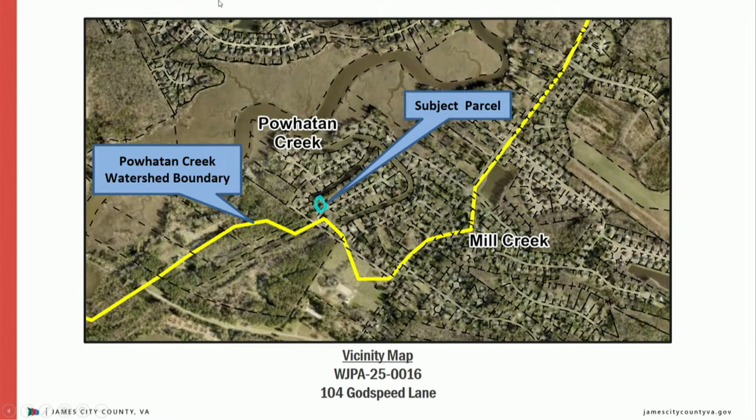Chairman, members of the board, Emily Grosjean, Watershed Planner, presenting WJPA 25-0016. NAMO LLC has applied for a wetlands permit on behalf of Mr. Robert Engels for the installation of a bulkhead on property located at 104 Godspeed Lane within the Powhatan Creek watershed. As you can see, that watershed boundary is outlined in yellow with the subject parcel in question in blue.

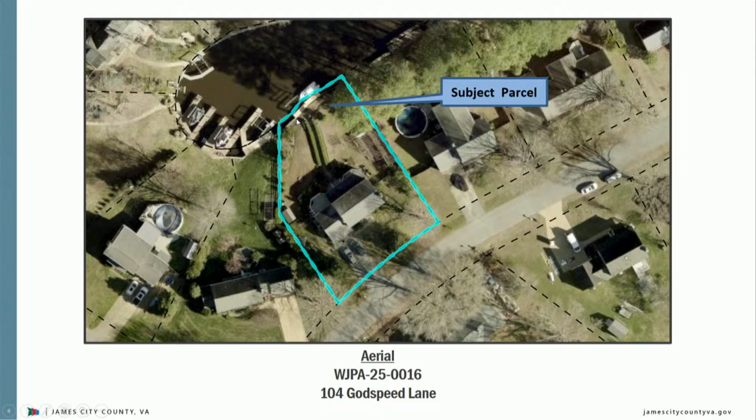On April 16th, 2025, staff was notified by the agent that a bulkhead had failed at 104 Godspeed Lane and the permitting process to install a new one began. The applicant is proposing to install a 73-foot vinyl bulkhead in the same footprint as the existing failed wooden one. All work will be accessed from the upland. So this is a site plan here with that bulkhead going in the same footprint, here in orange.

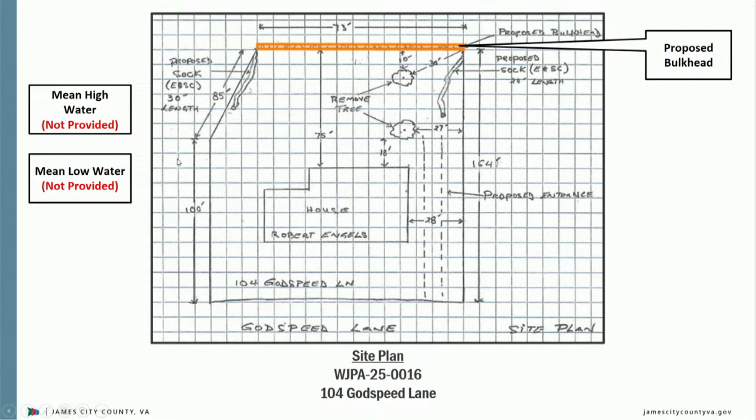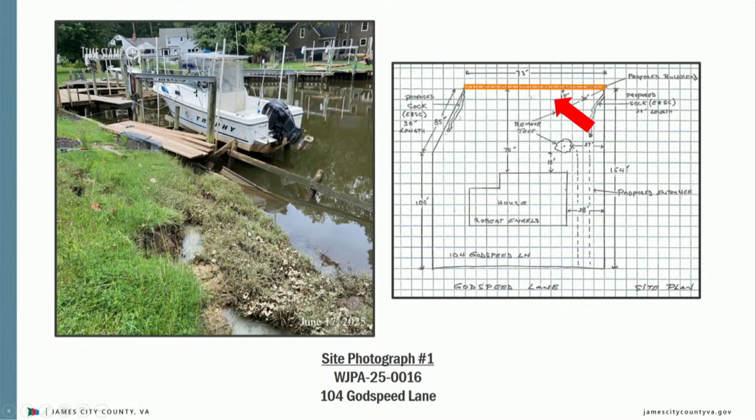And just kind of as a reference point, clearly it has failed, and this is the erosion that's currently going into the canal behind the property. Just a further down look of that existing bulkhead that has failed, and then to the end here where it ties into that adjacent bulkhead.

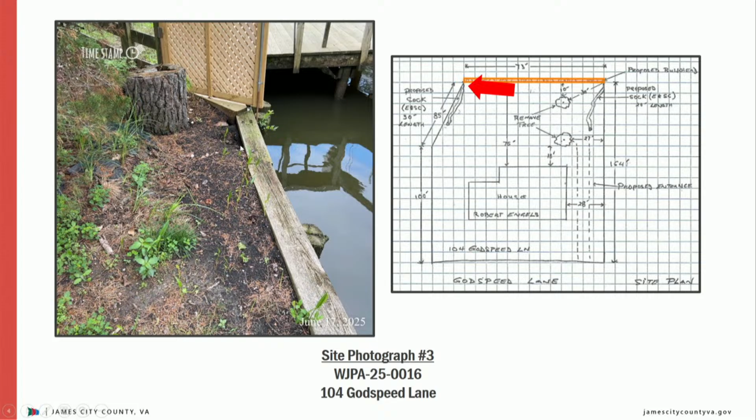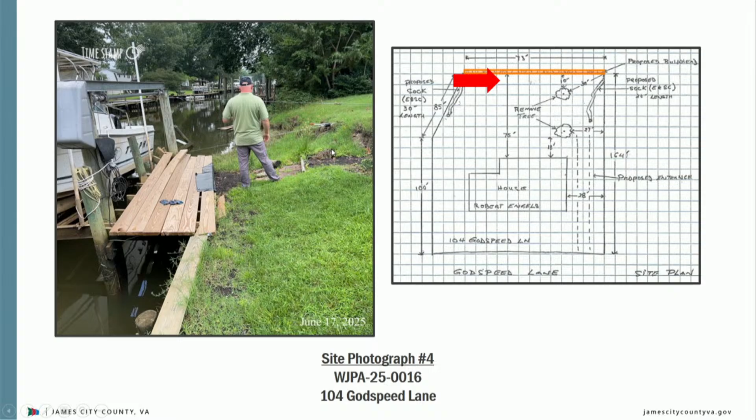And then looking back down the other way to the right, again, we see where it's failed and how it's kind of just being held in right here. You can see where the land just kind of sloughed out into that canal. And then looking further down to where it's going to tie in here to that adjacent bulkhead.

On February 1st, 2025, the Wetlands Mitigation Compensation Policy of the Code of Virginia was amended. Virginia, as a Chesapeake Bay program partner, is committed to achieve a no net loss of existing wetlands acreage and function in the signatories' regulatory programs. In order for a proposed project to be authorized to impact wetlands and compensate for the wetland loss in some prescribed manner, the following three criteria must be met.

All reasonable mitigative efforts, including alternative siting which would eliminate or minimize wetland loss or disturbance, must be incorporated in the proposal. The proposal must be clearly water dependent in nature, and the proposal must demonstrate clearly its need to be in the wetlands and its overwhelming public and private benefits. If the proposed project cannot meet one or more of the above criteria, the project must be denied or must occur in areas outside of wetlands.

Should it satisfy all three criteria, however, compensation for the wetland loss is required. The sequence of acceptable mitigation options should be as follows: mitigation bank, approved in-lieu fee program, permittee responsible on-site and in-kind mitigation, or permittee responsible mitigation through off-site or out-of-kind mitigation within the same watershed.

If compensation is required, it should be a condition of the permit. Staff has reviewed this application and finds that this project meets the 3 criteria outlined above. While there are no proposed vegetated tidal wetland impacts, there will be disturbance within the RPA due to construction access in the upland portion of the site and associated grading.

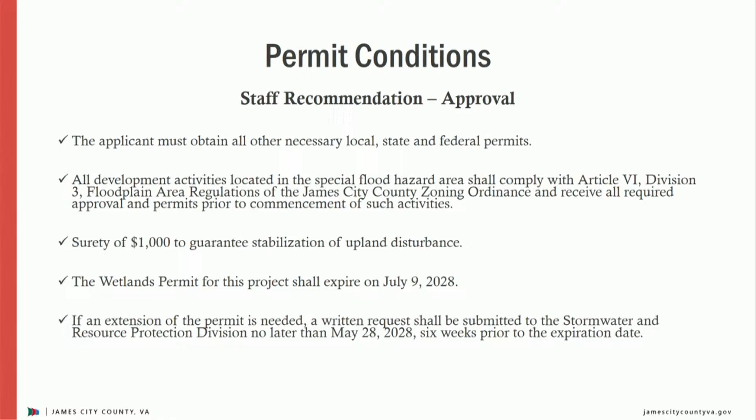Questions for the staff from the board? Emily, was that a recent catastrophic failure slump? Yes, the owner had noticed that it was going into failure for some time and had been proactive trying to find a contractor. And then unfortunately, just with the weather, it just eventually gave out. So it hasn't had time to resume a new normal circumstance. Correct.

Any reason given for the 2 trees to be removed? In speaking with the contractor, they're going to try to avoid removing one of them. It's an apple tree that the owner has, and they don't want to mess with it if they don't have to. So I encourage them to include it on the application should they need to remove either of those trees, given the construction entrance. Okay.

No additional questions? No other questions for staff? Then we'll open the public hearing and take comments from either the applicant or the contractor. If you could come up and state your name and address.

My name is Jeanette Engels. I live at 104 Godspeed, and that's what you're talking about, being able to get a permit. We seem to be losing more soil every day. Every time there's a high tide, more dirt goes out with it. I really don't know what they're going to be doing about it, but I have to leave that to the professionals.

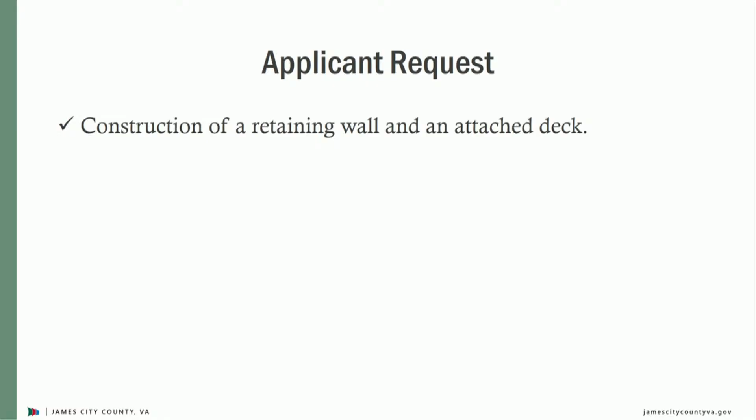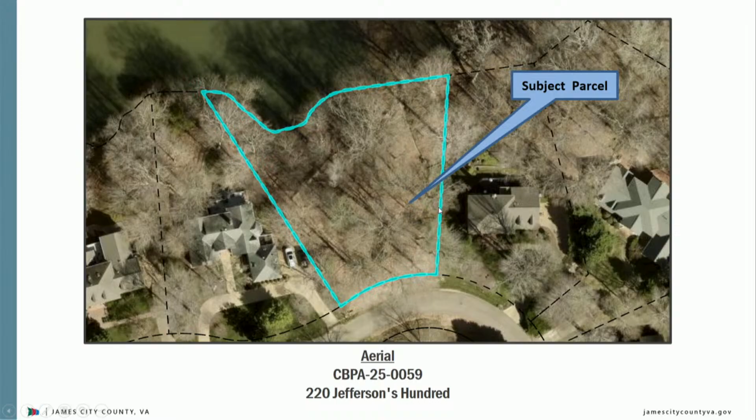The total lot size of this property is 0.647 acres, of which 68% is located within the RPA. The applicants are proposing to construct a retaining wall and an attached deck at the rear of the proposed single-family dwelling, which will be administratively approved. Total impacts to the RPA associated with this proposal equate to 396 square feet in the landward 50-foot RPA.

Required mitigation for this amount of impervious impacts equals 1 planting unit for the proposed accessory structures. The applicants have provided a mitigation plan equaling 5.5 planting units: 2 canopy trees, 4 understory trees, and 50 shrubs, therefore satisfying county mitigation requirements for both the home and accessory structures.

Here is the site plan showing the wetlands boundary in green, setback in blue, which they have received a variance from Kingsmill to pull the house forward, encroaching into the setback. It's the 50-foot RPA boundary, 100-foot RPA, and the proposed deck, retaining wall, and then they are also proposing some riprap to assist in stormwater management.

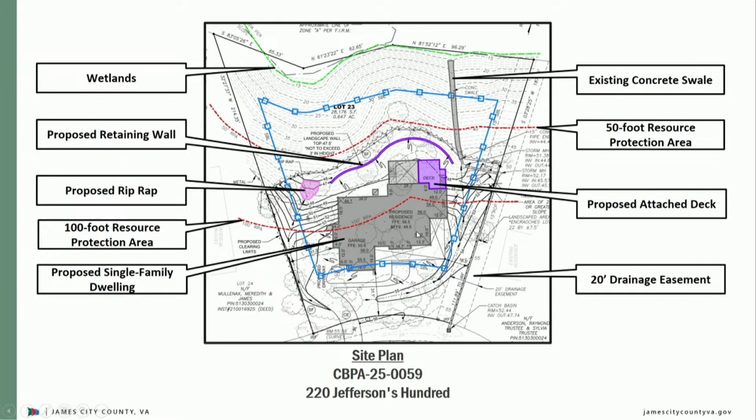This is the mitigation plan. The property was not flagged prior to staff taking site photos, so I've tried to orient it as best as I could. Here is a photo looking right off the edge of the pavement.

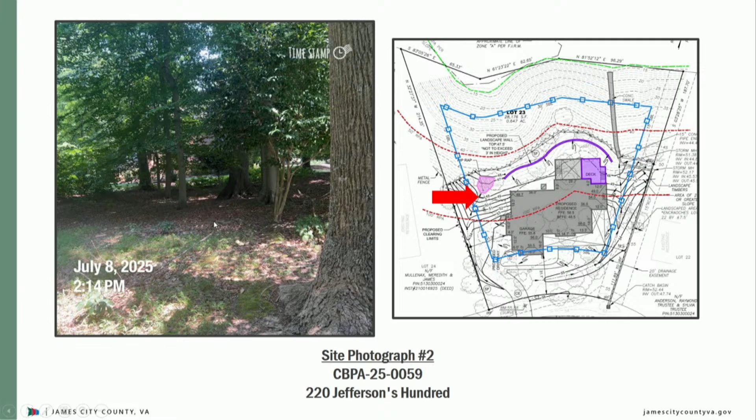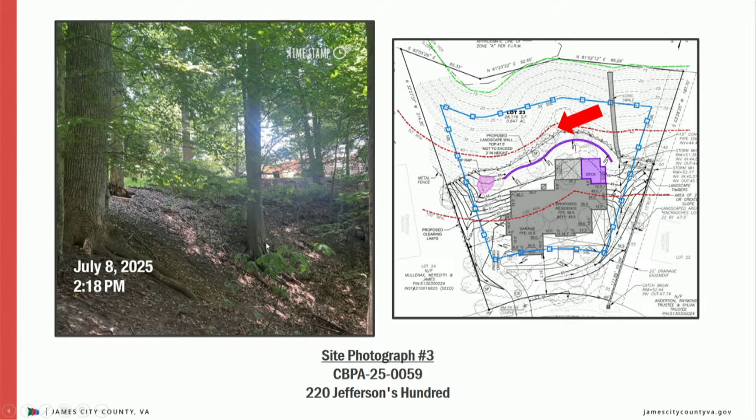This, I believe, is the approximate location of the back corner. The back of the house will be in this direction, and the deck will be approximately here, looking back towards the roadway, and then towards the deck, which I believe will be the general area. The retaining wall will be about here, and the riprap in this general area.

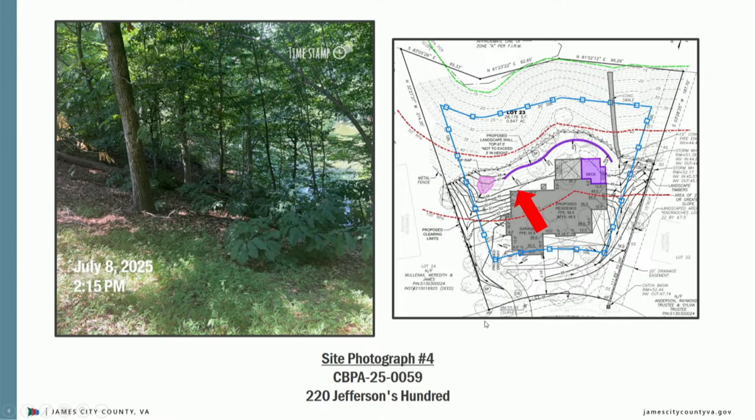And then a photo to show you the topography at the rear of the property. Staff has evaluated the application and exception requests for the construction of a retaining wall and an attached deck. This application meets the ordinance conditions in sections 23-11 and 23-14 and should be heard by the board because the construction of a retaining wall and an attached deck is considered accessory in nature.

The board may grant exceptions to section 23-7 if the application meets the following 5 conditions, which you have before you. Staff has reviewed the application and exception request and has determined the impacts associated with the proposal to be minor for the proposed development. Staff recommends approval for this exception request, and if the board wishes to approve the request, staff recommends the following conditions be incorporated into the approval: the applicants must obtain all other necessary federal, state, and local permits as required for the project.

The applicants must submit a surety of $4,125 in a form acceptable to the James City County Attorney's Office to guarantee the mitigation plan, equaling 5.5 planting units: 2 canopy trees, 4 understory trees, and 50 shrubs. This exception request approval will become null and void if construction has not begun by July 9th, 2026. A written request for an extension must be submitted to the SRP division no later than May 28th, 2026, six weeks prior to the expiration date.

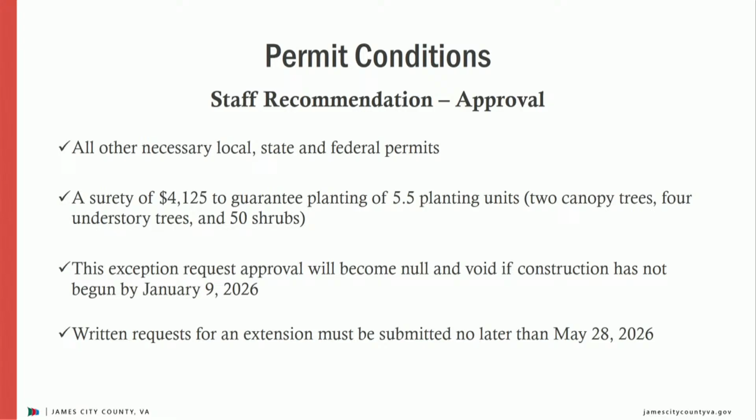I'd be happy to take any questions at this time. Any questions for staff? Thank you very much.

With that, I will open the public hearing. Would the applicant or their agent care to address the board?

Mr. Chairman, Mr. Grogg, welcome. Thank you. Members of the board, good to see you. Chase Grogg with Land Tech Resources, 205 Bulifants Boulevard, Suite E, Williamsburg, Virginia, 23188.

Thank you, Mr. Chairman and staff, for allowing me to attend this meeting remotely. I'm here tonight representing Mr. and Mrs. Leach on their proposed home construction in the Kingsmill subdivision, though staff has pointed out to the board it is only reviewing the proposed deck, wall, and riprap. This proposed impact is pretty straightforward, but I would like to highlight a couple of items.

As staff mentioned, this lot was platted in 1989 and has remained mostly untouched while surrounding lots have been developed. When I first looked at this lot, I thought that approaching the Kingsmill HOA for a front setback variance would be our best approach. We were able to receive a 4-foot front setback variance from the HOA, which helped.

Move the house location away from the top of the well-known Kingsmill slopes. With the slopes in mind, we added a small retaining wall around the rear of the house to help have a small backyard and bring some additional stabilization to the rear area of the house. It will also allow water that runs off the back of the house to sheet flow at a slower rate, as well as filter through the stone behind the proposed retaining wall. Though this is not a formal infiltration practice, it still serves as a benefit to the lot and downstream watershed.

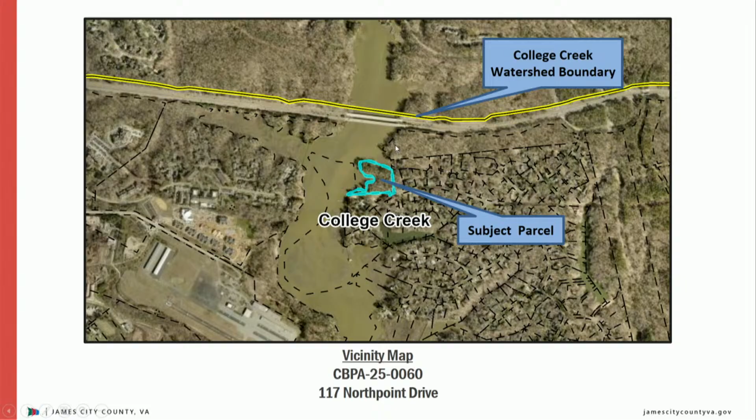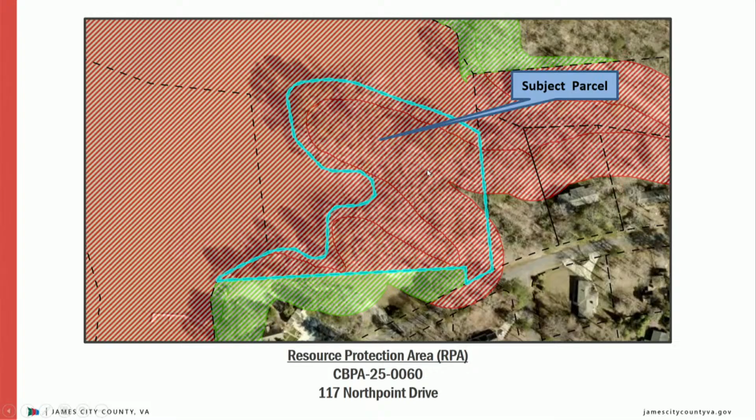Here we have that subject parcel outlined in blue with the watershed boundary highlighted in yellow, and a closer look at the parcel in question along with the current topography and RPA. As you can see, a majority of the lot, about 99%, is within the RPA and the floodplain as well. The total lot size of this property is 3.49 acres, of which 99% is located within the RPA, as previously stated. The applicant is proposing to construct a single-family dwelling, detached garage, walkway, and driveway.

Only the detached garage and a portion of the proposed driveway that encroaches into the 50-foot seaward RPA are before the board for approval this evening. A previous Chesapeake Bay exception was administratively approved under CBPA 23-0069 for the existing driveway access.

The applicant has proposed a mitigation plan of 8 canopy trees, 26 understory trees, and 191 shrubs, with the addition of 3 infiltration trench stormwater best management practices, or BMPs. This meets the county's mitigation requirements. A letter of installation from a qualified professional to the Stormwater and Resource Protection Division prior to the issuance of a final certificate of occupancy will be included as an approval condition. This letter must verify compliance with all approved construction plans for stormwater BMP facilities. No surveyed as-built drawings are required.

This is the overall site plan here. I will be moving in closer shortly so you can better view this. What is before the board for legislative approval is highlighted in purple and orange, with the orange impacts of the driveway being that of the 50 seaward RPA, and the detached garage in purple as it encroaches within that 100-foot RPA buffer. Looking closer here, everything within this portion of the lot is in the first 50 feet, the landward 50-foot RPA buffer, and then the orange driveway portion is in the 50 seaward.

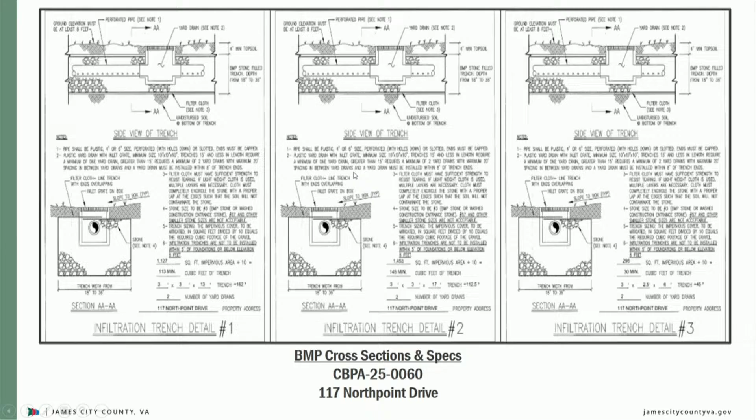We have the proposed single-family dwelling and walkway here, which is under administrative approval, the detached garage and the driveway, along with the 3 infiltration trenches outlined in pink. These are the cross-sections and specs for those proposed infiltration trench BMPs. And this is the proposed mitigation plan, with all the proposed mitigation highlighted in green here.

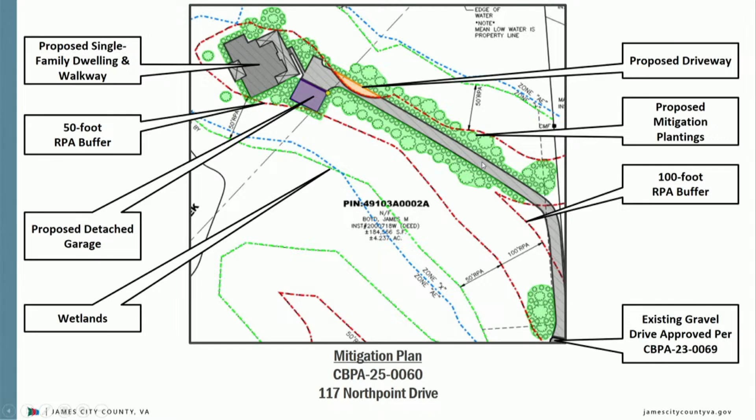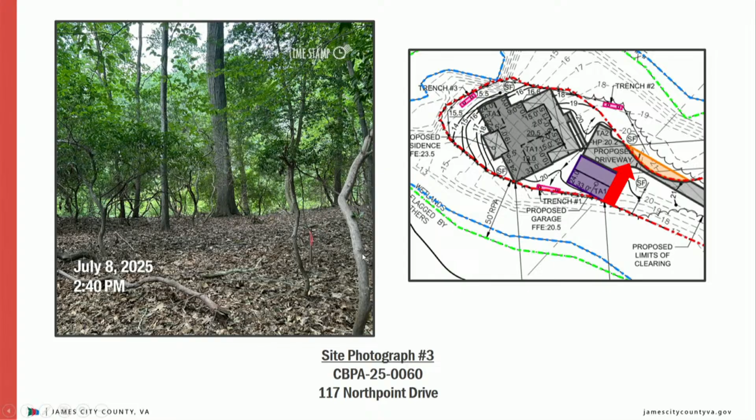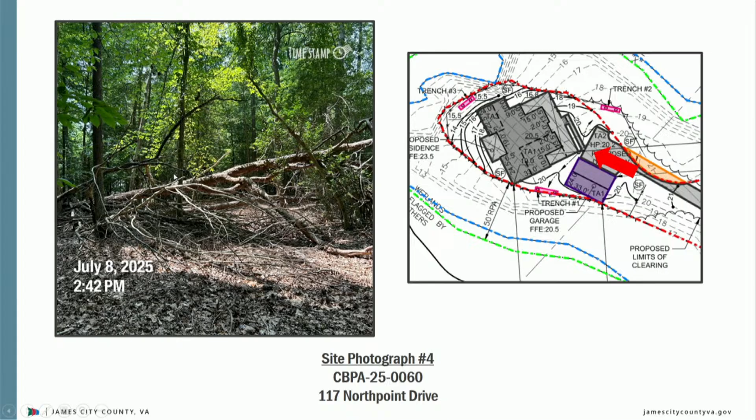And then some recent photography of the site, moving up the driveway here to give you an idea of where we're at in the lot. Moving further down, you can see the staking for the extent of the driveway and its impacts within the 50 seaward. Looking to the right more, there's a stake indicating the extent of disturbance within that 50 seaward RPA buffer. Looking back to give you an idea of where that driveway ends and the detached garage would begin, along with where the proposed single-family home and walkway would be. Moving further left to show you the location of the detached garage, and again where that garage would be in terms of its extent in the 50 landward RPA buffer.

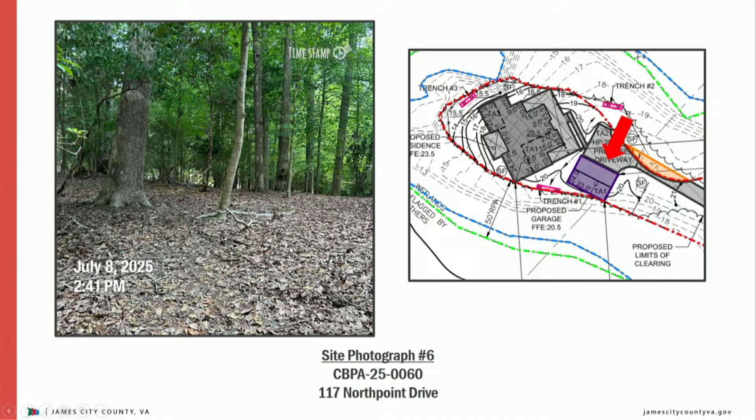Staff has evaluated the application and exception request for the construction of a single-family dwelling, detached garage, walkway, and driveway. This application meets the ordinance conditions in sections 23-11 and 23-14 and should be heard by the board because construction of a detached garage is considered accessory in nature, and a driveway within the 50-foot seaward RPA cannot be approved administratively.

The board may grant exceptions to section 23-7 if the application meets the following 5 conditions outlined before you. Staff has reviewed the application and exception request and has determined the impacts associated with the proposal to be major for the proposed development.

If the board wishes to approve the request, staff recommends the following conditions be incorporated into the approval. The applicant must obtain all other necessary federal, state, and local permits as required for the project. The applicant must submit a surety of $12,500 in a form acceptable to the James City County Attorney's Office to guarantee the mitigation plan equaling 8 canopy trees, 26 understory trees, and 191 shrubs.

The applicant must record an affidavit in the Williamsburg-James City County Courthouse prior to the release of surety. And as stated previously, the applicant must submit a letter of installation from a qualified professional to the SRP division prior to the issuance of a final certificate of occupancy for the 3 proposed stormwater BMPs on site.

The exception request approval will become null and void if construction is not begun by July 9th, 2026, and written requests for an extension to an exception must be submitted to the SRP division no later than May 28th, 2026, which is 6 weeks prior to the expiration date. If you have any questions, I'd be happy to take them at this time. Questions for Emily?

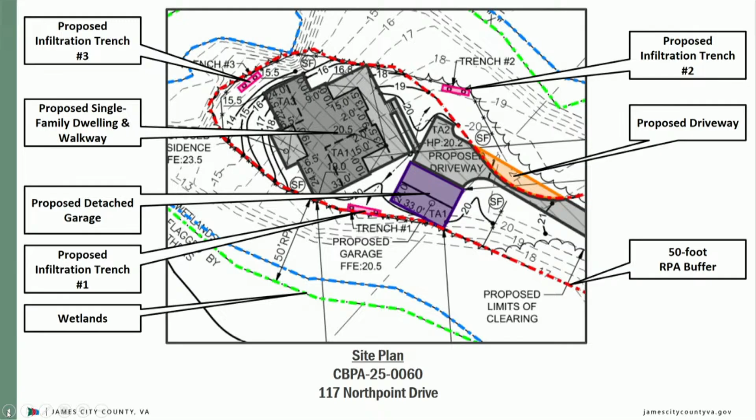I think that's the only question I had. Any other questions for staff? BMPs are there to compensate for the additional mitigation that would normally occur if you had more canopy trees, and they're... I can't speak to that. That would be a question for the applicant.

Any other questions? Mr. Grog, are you still with us? I will open the public hearing.

I think he's connected. I'm still here. I'm still here, but I thought Sean with Crossroad was going to... I was here just in case. Is Sean there? Yeah, he is. Okay.

Good evening, Board. Sean Lemon, Crossroad Custom Builders, 7596 Uncle's Neck, Joanna, Virginia. Here addressing as an agent for the applicant.

The two questions that were asked by the board: one being the driveway side, that area is part of the flatter portion of the property. So while it looks like there's a drop off there, it's actually pretty flat through that area where the driveway comes through. There would not be a need for a retaining wall. We would be able to take care of the grading without excavation or filling in that space.

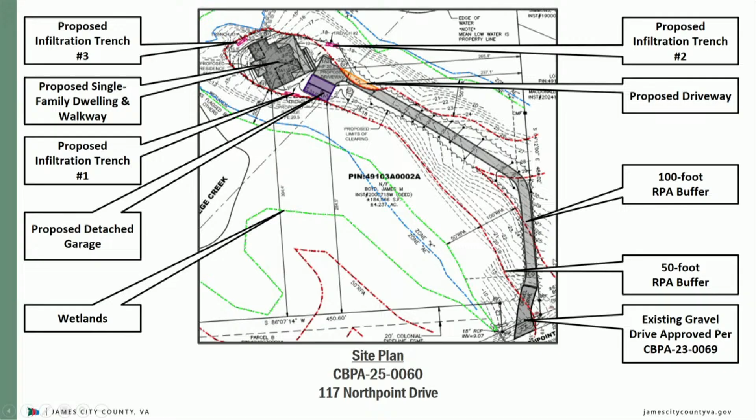With respect to the site plan, it doesn't appear that there's a conflict, but the individual does have concerns. What's currently proposed does not actually encroach on the property.

Said he was at 117, but this is 117, isn't it? Oh, excuse me, he's at 115 to the right. But just for clarity and for the record, as proposed and as presented, it is not encroaching on his property, correct? Thank you.

Any other questions for Ms. Grosjean? Discussion amongst the board?

Looking at this, given that the garage and the driveway are the two pieces we're reviewing, I looked at how they might site it slightly differently to perhaps reduce the encroachment, but that bump out in the wetlands creating that bubble that the driveway hits is pretty hard to avoid.

As proposed, with the addition of the stormwater treatment facilities, I don't have an objection to this project. I would agree with you on that. I would be in support of this application.